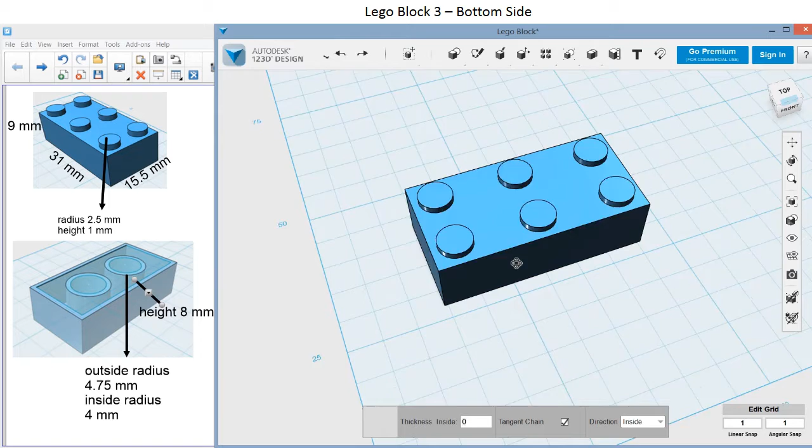Click on shell, after rotating the Lego block so you can see the bottom. If you click on the bottom face, sometimes it will shell it for us, and if that's the case, we can just type 1 for the thickness and push enter. If that doesn't work and it gives you an error, you might have to try this instead.

Insert a sketch rectangle on the bottom face, and the length will be 2 less than what it was before. So we're going to go 13.5 by 29, and then we'll place it right in the center of our Lego block.

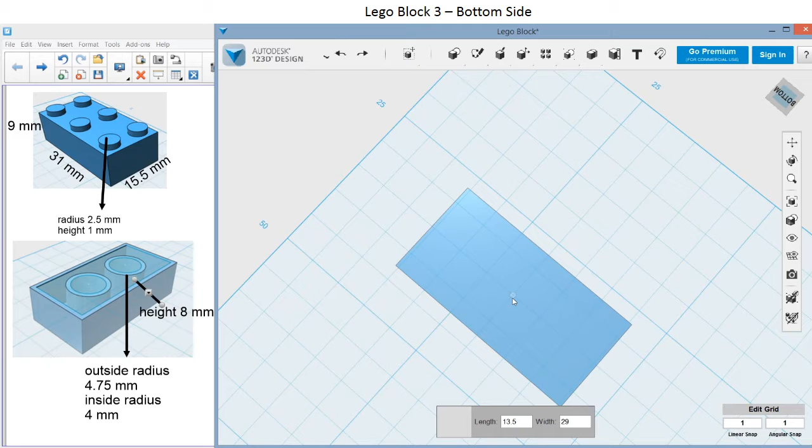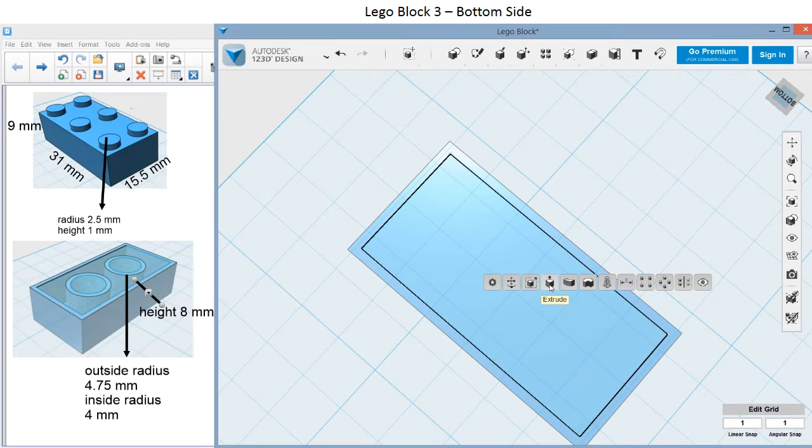What we can do then is extrude that. If we now click on that rectangle, we can extrude it and make it a height of 8. If I go to the side, you can see my arrows pointing down. I can either pull it down until it reads 8, or just type in 8 and push enter. Now you've done the same thing, either shelled it or made the rectangle there.

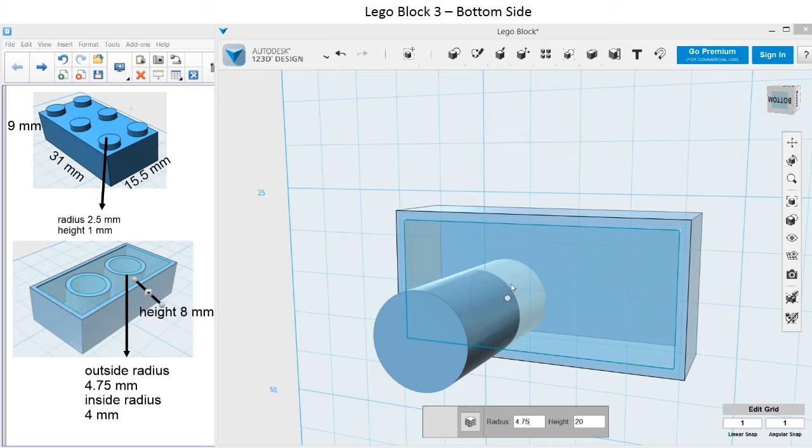Now what we want to do is place some cylinders inside the object. So we'll take a cylinder, place it in there, and do a radius of 4.75 and then a height of 8. Remember, you can push tab to do that.

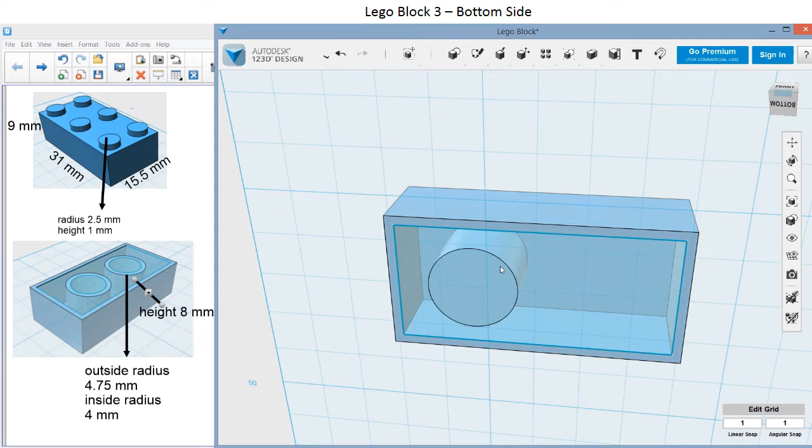Then I'll just place it in there approximately, somewhere - we can move them later. Click on that, and then from here you'd probably want to copy and paste it. If I click on my cylinder, sometimes you have to double click around a few times. There we go - now once it's highlighted, I can go Control C, Control V, and then pull it out, and it creates an exact copy. Again, just place it somewhere and push enter.

Then we can try the shell feature again to make that hollowed out, and it might work, it might not. So we'll try shell on the face, and it looked like it worked, so I'll make it again for 1. Push enter. Now the other one, let's do it the other way.

Let's draw a circle on there, make it a radius of 4, and extrude it down 8. Now it should have a hole in it. Just doing that, double checking here - there we go. Okay.

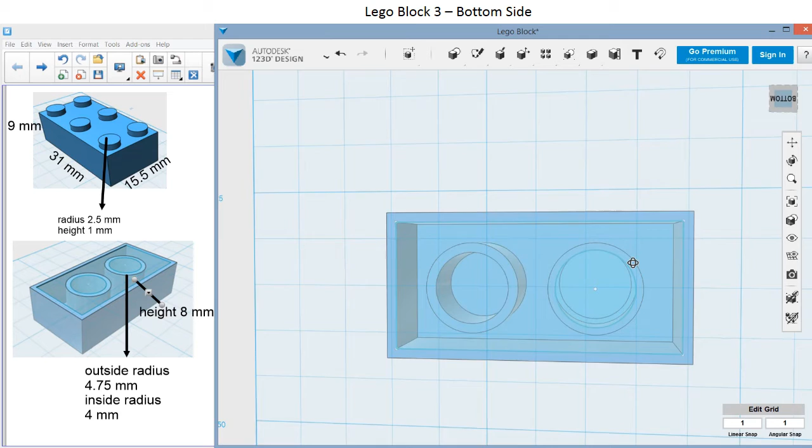Now we want to place our cylinder at the correct spot. So we're going to change this from materials and outlines to outlines only. Then we're going to hold onto the cylinder and start dragging it, moving it where we think it should go. You just have to keep rotating and looking. That looks pretty good - it needs to interlock with all of the cylinders on top.

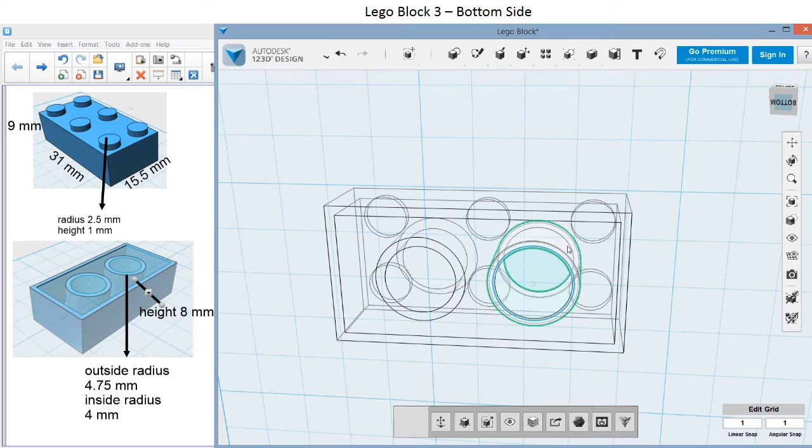So we'll drag the other one so that it lines up properly. Again, sometimes you have to right click or double click on things to get to the correct spot. That one actually looks pretty good where it is.

So that's the end of the Lego block. If you want to print this one, make sure you export it to the public drive - export as 3D STL. With this one, you're definitely going to have to click Combine Objects when you do that, and then click OK and save it to where you want to.